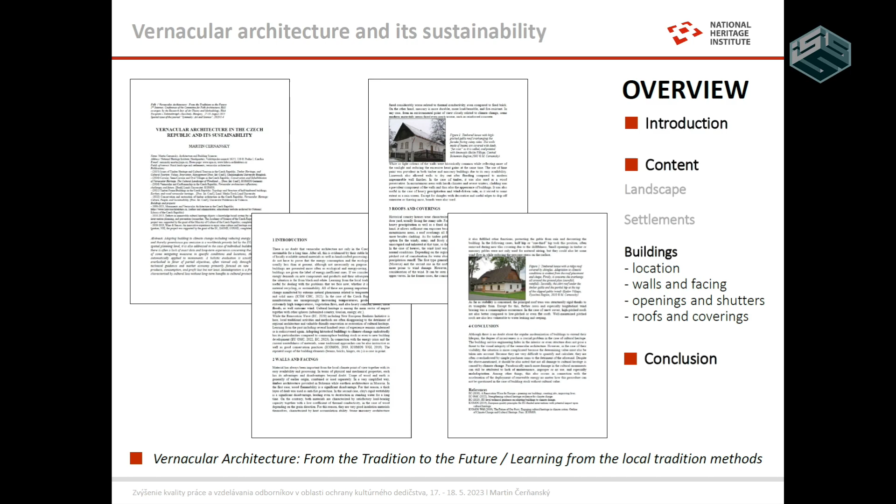Secondly, the buildings or the parts are described, including the most common natural phenomena. Of course, I had to leave out landscape and settlements, although it is also very important, and it would be beneficial to start with landscape, then settlements, and in the end the buildings themselves. So thirdly, some conclusions will be followed at the end of my short talk.

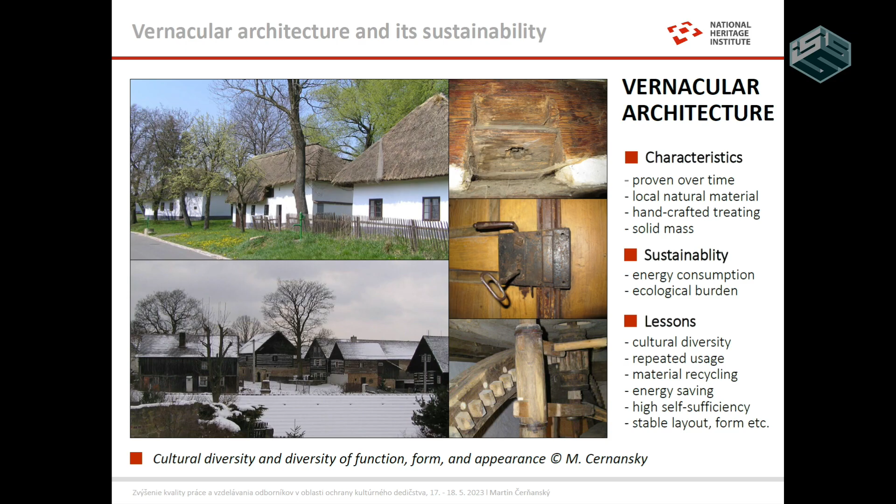I begin with the well-known features of vernacular architecture and its sustainability. It doesn't matter if in connection with the topic of energy efficiency of buildings, or another topic like ecological burden and so on, not to speak of cultural identity, which is, I think, a crucial topic for us.

In addition to that, you can see other lessons, learning methods, and knowledge from local tradition. So I think that is very important.

I show something about cultural diversity and diversity of function, form, and so on. You can see several pictures. I think that is important, for example, the repeated use of some beams or hinges and so on.

It was quite common, of course, because it was quite expensive. It was not an ecological approach at the time, maybe, but it was about saving energy, saving money, saving resources. So also about stable layout, as can be shown in another example.

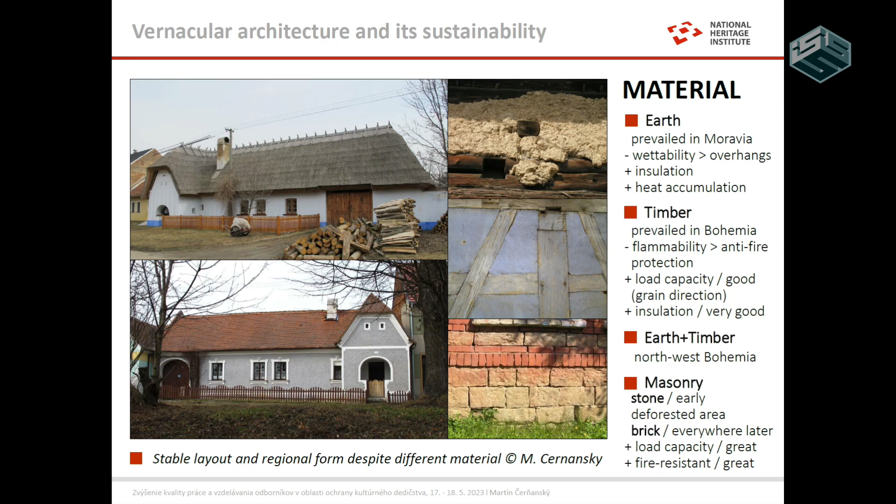So now I would like to remind you that there is no doubt that in many ways the use of building material is of primary importance, whether it is about construction, shape, form, bearing capacity, thermal insulation, and so on, for example fire resistance. As we can notice, despite the material, the stable layout and traditional regional form can be

seen on the photos on the left. Because of the stable position of the chimney, meaning the kitchen, and the stable position of other parts of the house, for example porch, gate, and so on, it looks very similar, although there were some changes, especially according to flammable material and so on.

I think that is enough for now for the introduction. Just to say generally that in the Czech Republic, although we are a very small country, we use all the techniques which are known in other countries.

We use earth for this, we use timber, also we use stone, and later brick. It differs according to region, according to local conditions, according to whether it's situated in some big center or not, and so on.

So now a few examples will follow to show the issue in relation to climate change, in general maybe climate condition at the time, and adaptation of buildings which are exposed not only to climate impact but also to another social phenomena and other issues.

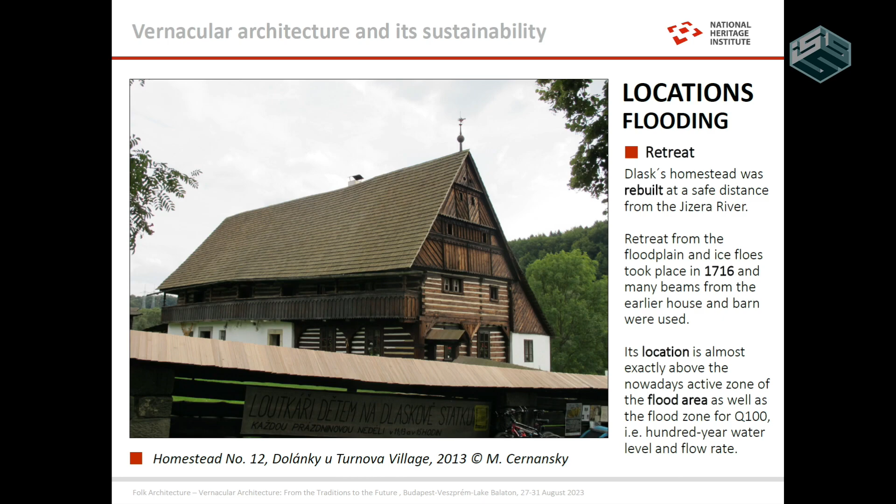The first example is about a homestead, and this homestead was rebuilt at a safe distance from a river in the Czech Republic. This retreat from the floodplain and ice floes took place at the beginning of the 18th century, 1716 exactly, and many beams from the earlier house and barn were used again.

I checked the map of today's flood active zone, and the location of the homestead is almost exactly above the nowadays active zone of the flood area, as well as the flood zone for Q100, meaning the 100-year water level and flow rate. It is not based on measurement but on local experience.

So I think that we can learn from this knowledge of the local condition without some measurement or something like this. Another example concerns walls and temperature.

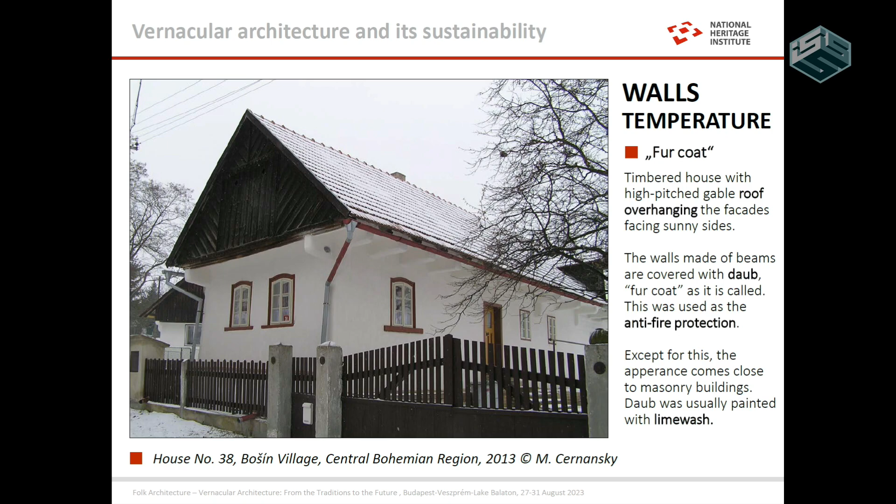We discussed a lot about insulation today and the days before. For example, all timber houses have high pitch gable roofs, and this roof overhangs the facade facing sunny sides. Of course, it has something to do with the inclination and position of the sun in summer and winter. So the walls made of beams were covered with daub.

In the Czech Republic, it is called a fur coat. And it is not just because of thermal insulation, but there was another reason for this: anti-fire protection, regardless of the possible cause of the fire.

Except for this, the appearance came to resemble a masonry building. So there was another reason, not just protection against fire, but also something to do with rules and other restrictions, to show the house as made of masonry, although you can see it is made completely of timber because the beams are overhanging and can be seen. So it was about walls, about temperature, about anti-fire protection.

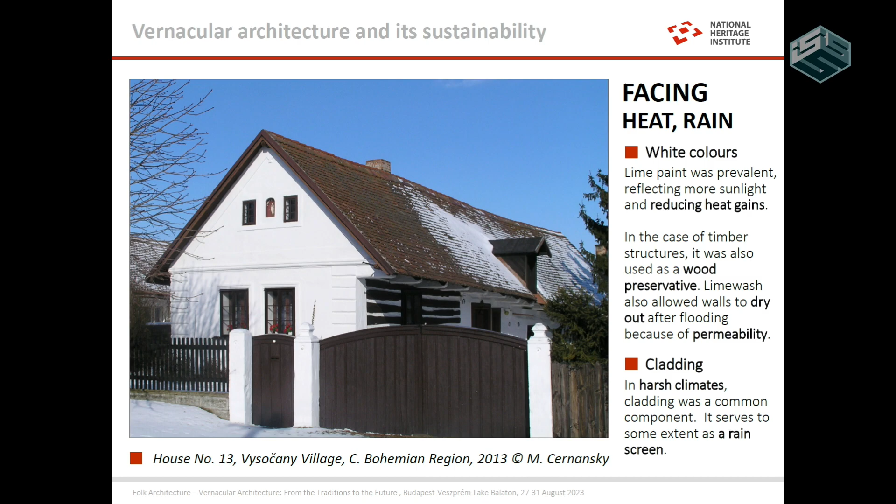Another example concerns the facing of the walls. Usually lime paint was prevalent, reflecting more sunlight and reducing heat gains. The heat gains in this case were lower in comparison to black color, for example. In the case of timber structures, it was also used as wood preservative.

The lime wash also allows walls to quickly dry out, for example after flooding, because of the permeability of the lime. So I think it was quite common in many regions because of the properties of the lime and lime wash.

In this picture, you can see that it is an old timber house, but the front facade was newly rebuilt, made of masonry, which was quite common because of moisture and sometimes because of aesthetic reasons.

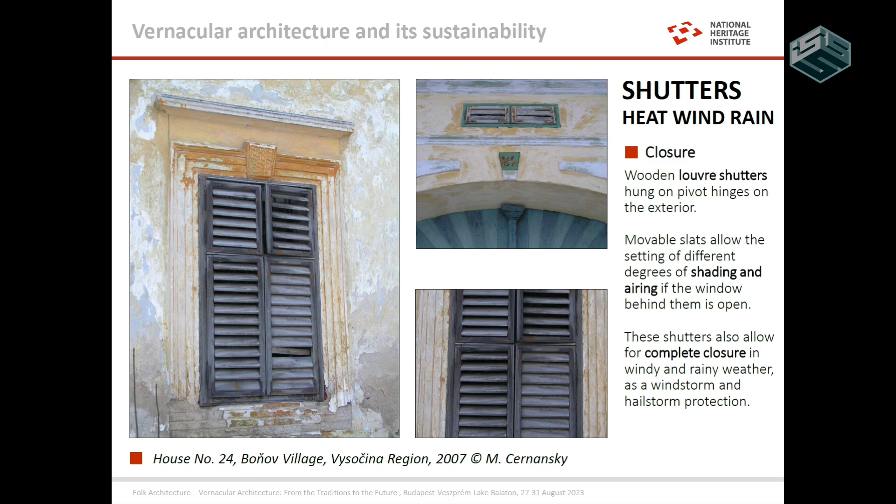Now I would like to highlight the importance of shutters against, for example, heat, wind, as well as rain. Wooden shutters, which we could see yesterday on our field trip, hung on pivot hinges on the exterior. Movable slats allow the setting of different degrees and angles in relation to shading and also in relation to airing if the window behind them is open.

These shutters also allow for complete closure, for example in windy and rainy weather, as protection against a windstorm or hailstorm. So it is another example of how to use the knowledge of that time about vernacular architecture and traditional dwellings in villages.

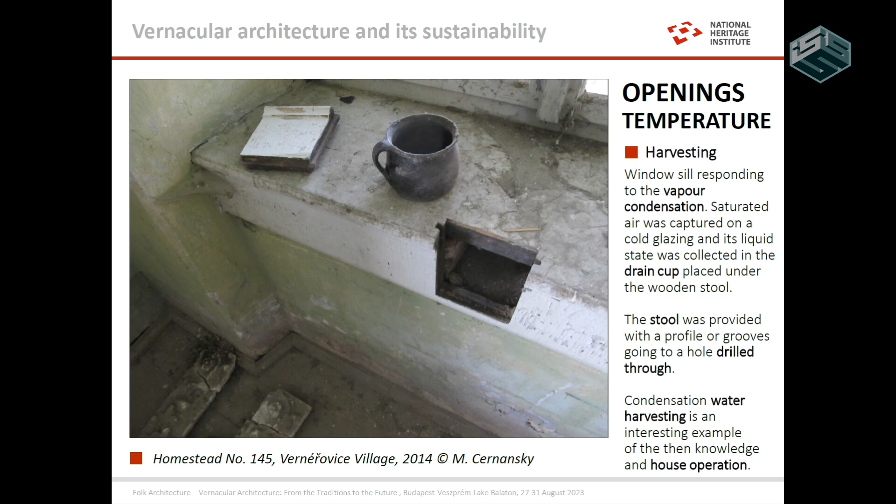Another example concerning openings is in relation to the interior of the building, not just the exterior like in the case of the shutters. You can see a windowsill responding to vapor condensation. There is a connection to the dew point.

Saturated air was captured on the cold glazing and its liquid state was collected in a drain cup. This drain cup was placed under the wooden stool. The stool was provided with a profile, or grooves, going to a hole drilled through the stool. So condensation water harvesting is, I think, a very interesting example of the knowledge and house operation of that time.

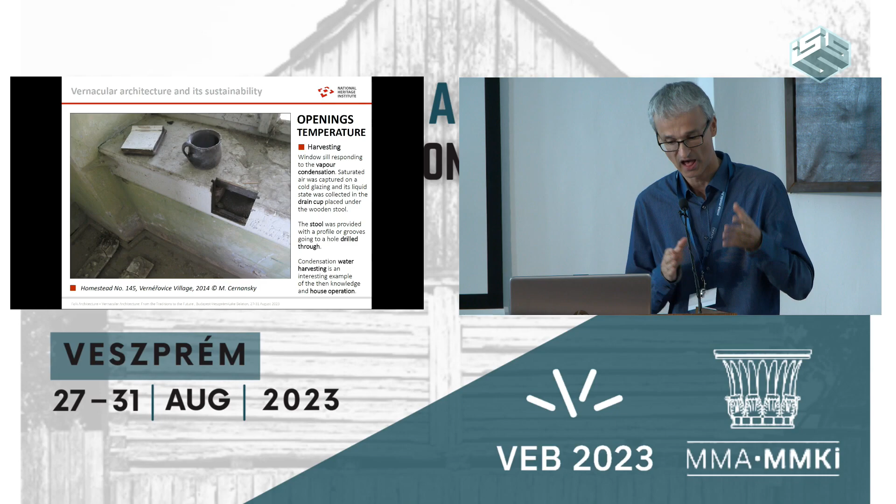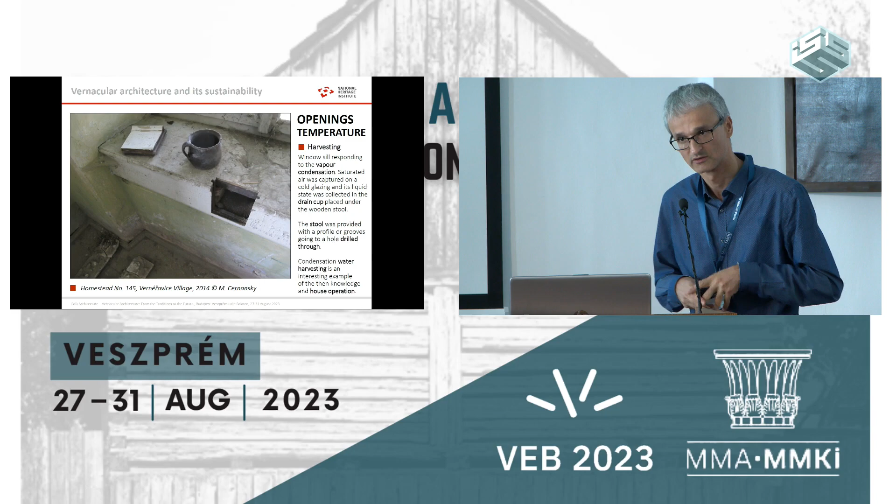In many cases we forgot some knowledge about house operation. Basically, I think it is very similar to today's air handling unit and heat reuse systems. I think it's good to know that our ancestors were clever about many physical phenomena, not just in our age.

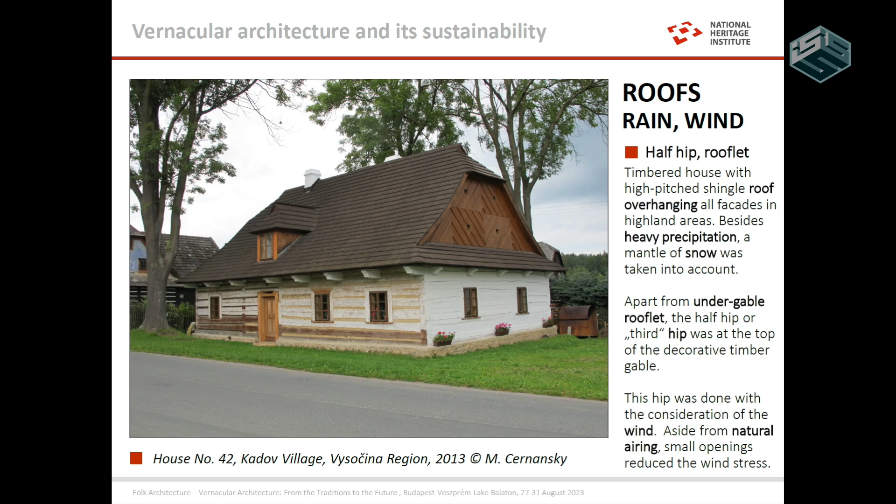So this is another example I would like to show. The next one is in relation to the roof. I would like to point attention to this part of the building.

All timber houses usually have a high-pitched roof covered with shingles, and the roof in some areas overhangs not just the south facades because of the sun, but also all facades, especially in some highland areas. Besides heavy precipitation, a mantle of snow was taken into account, so the overhang was on all facades.

Apart from undergable rooflet, as can be seen in the picture, the half hip, or sometimes just third hip, was at the top of the decorative timber gable, and this hip was done also with consideration of the wind, because the top of the gable was removed and the shape was made smoother.

Against wind, you can see small openings for ventilation in the decorative gable. This was good for natural airing on the loft, the space under the roof, and this small opening also reduced the wind stress, the load from the wind on this gable.

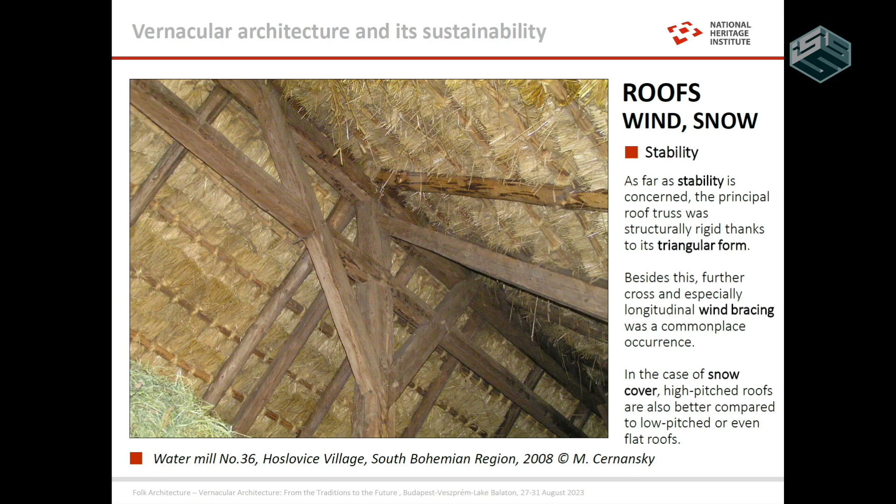In relation to the shape, I think the roof frame was also very important. As far as stability is concerned, the principal roof truss was structurally rigid due to its triangular form. It was quite typical to use a triangle also from the stability point of view.

Besides this, further cross and especially longitudinal wind bracing were used as a common occurrence in all types of roof, as we could see before. In the case of snow cover, high-pitched roofs are also better compared to, for example, flat roofs, because it was much easier for snow to fall down.

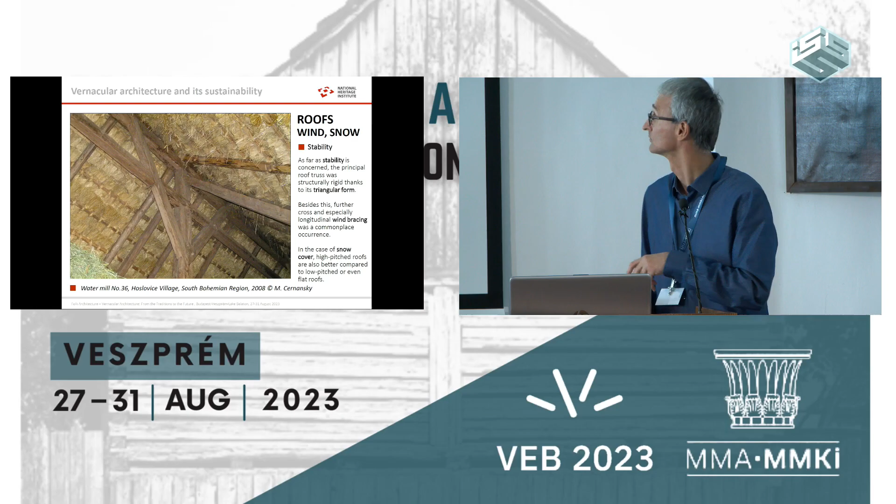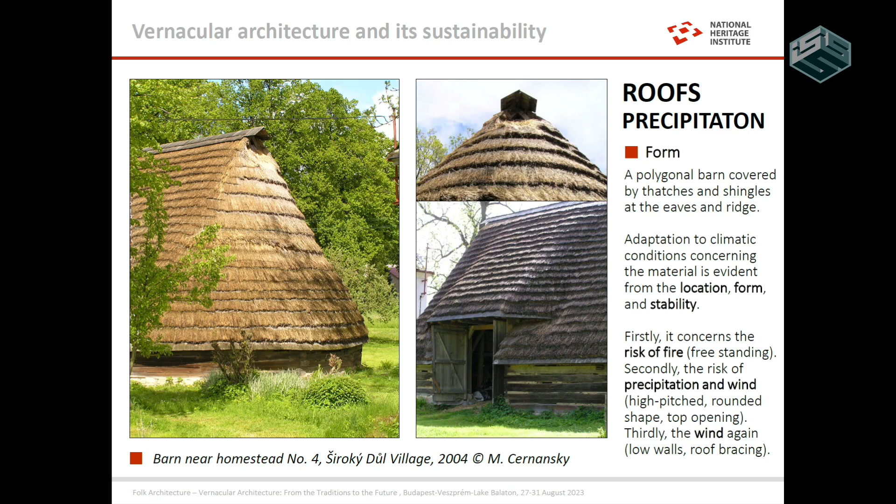Another example is about covering, because I think that covering was equally important as structure, so at the same time it mattered what was put on the roof truss. As an example, a polygonal barn was covered with thatch and shingles.

The eaves and ridge are shown because I think there's no need to remind here that in both cases it was a highly flammable material, easy to soak when wet. An adaptation to climatic conditions concerning the material is evident here from the location, form and stability.

Firstly, it concerns the risk of fire, because usually these barns covered with thatch and shingles stood alone, and later when covered by tiles, they could stand close to other buildings of the farmstead. So this is a risk of fire.

Secondly, the risk of precipitation and wind. It can be seen because they had high pitch, more than other types of buildings, and sometimes you can see that these polygonal barns were round shaped at the ends because of wind.

So it was another reason, not just to let rainfall fast down, but also for an aerodynamic shape against wind.